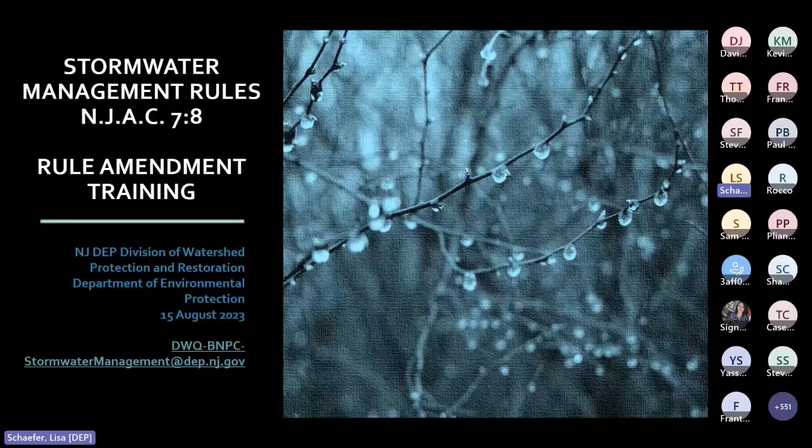Today's presentation will focus on the amendments to the stormwater management rules, as rule update presentations are now required training for those who review major development projects for a permittee under the Municipal Separate Storm Sewer or MS4 permit within 1 year of the adoption of said amendments. Okay, so today I will first provide you with a brief history leading up to the amendments and an overview of the studies that were also involved.

Executive Order 100 was signed by Governor Murphy on January 27th of the year 2020. This required that the DEP shall, within 2 years of the date of this order and consistent with applicable law, adopt Protecting Against Climate Threats or PACT regulations. Furthermore, it required that the DEP integrate climate change considerations, such as sea level rise, into its regulatory and permitting programs, including but not limited to land use permitting, water supply, stormwater and wastewater permitting and planning, air quality, and solid waste and site remediation permitting.

So subsequently, Admin Order 2020-01 was signed by then Commissioner McCabe to integrate climate change considerations and so forth into the DEP's regulatory and permitting programs. So in accordance with this executive order, the department conducted research and underwent several stakeholder meetings beginning in 2019, first as part of the PACT rules, and then again independently in October of 2022. The department released a New Jersey scientific report on climate change in 2020 and reports on rainfall studies in 2021. All of these were in preparation to address the impacts of climate change, which then led to the proposal on December 5th in the year 2022 and adoption on July 17th of this year of the Inland Flood Protection Rule.

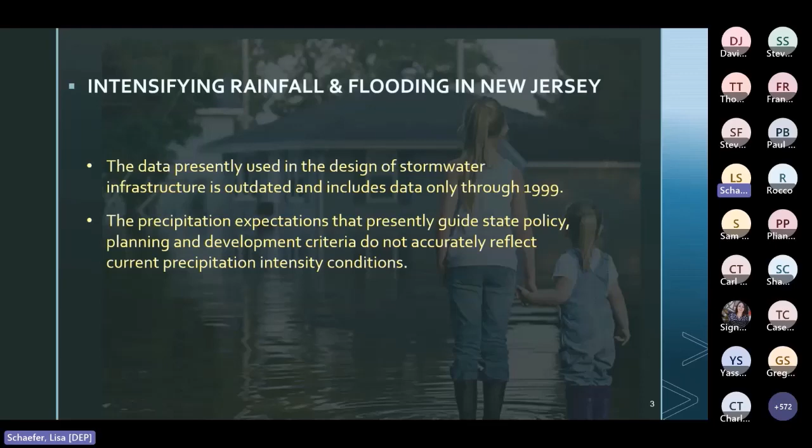So the reasoning behind the rule amendments is based on the scientific studies showing the data used for the design of stormwater infrastructure is outdated. It no longer reflects what is happening in our state. So much so that in November of 2021, the Northeast Regional Climate Center, which is a partner with the National Oceanic and Atmospheric Administration, which I will abbreviate as NOAA, and the DEP released studies showing that the 2, 10, and 100-year storms have all experienced increases in rainfall depths since 1999. Furthermore, reasonable predictions based on this information show that this will only worsen over the coming decades.

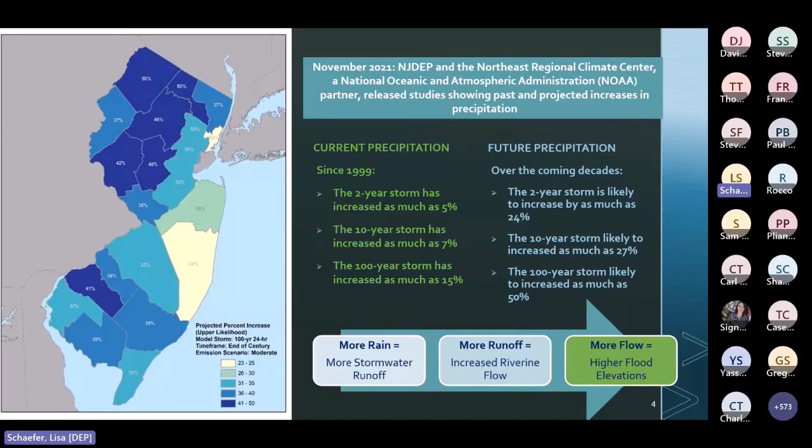So in many locations, stormwater runoff is often discharged off-site, and with the increasing intensity and rainfall depth, this will stress our infrastructure such as bridges, roadways, and stormwater management systems, and will create further problems down gradient of those discharge points. This in turn increases risks to the inhabitants and properties. Keep in mind, New Jersey is the most densely populated state, and most of the population centers are in the floodplain. So adding climate change on top of worsening flooding is just going to compound the issue and make things unsustainable.

The NOAA's rainfall precipitation and intensity data published in Atlas 14, Volume 2, or on NOAA's Precipitation Frequency Data Server have been used in stormwater management designs. However, the precipitation and intensity were based on data collected from weather stations ending in 1999, meaning the design doesn't really reflect the precipitation we are experiencing today. Add to that runoff from older sites where there was no stormwater management, and the impacts will worsen, potentially wiping out infrastructure and putting people in danger.

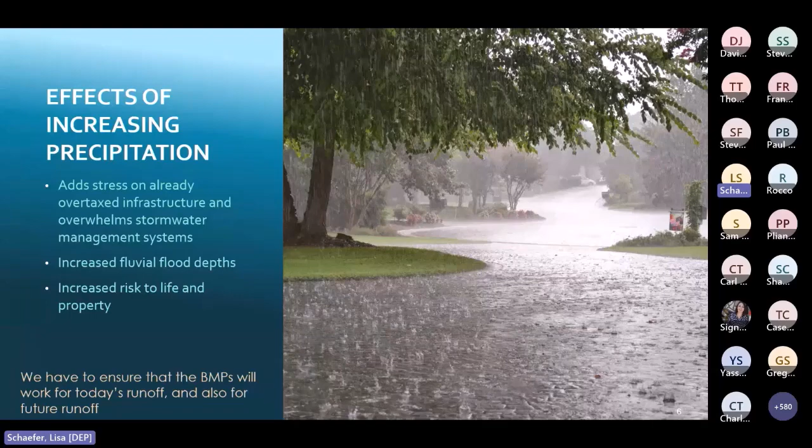And after that, there will be a bit longer discussion of the multipliers to be applied to modify the published NOAA rainfall data and how those multipliers are used in the calculations for groundwater recharge and stormwater runoff quantity control. I will also provide some examples, and I will briefly touch on the updates made to the BMP manual, the frequently asked questions, and the Municipal Stormwater Control Ordinance, which I will abbreviate as SCO when I cover the later slides. After this presentation, the team will provide answers to questions not covered in the chat, as well as to any additional questions asked as time permits.

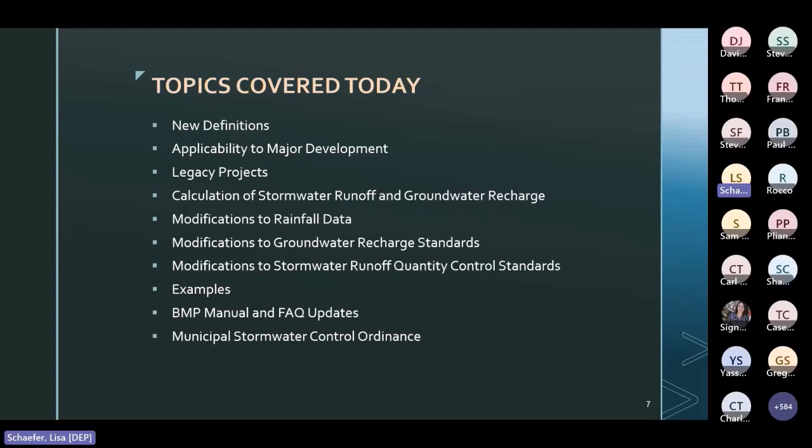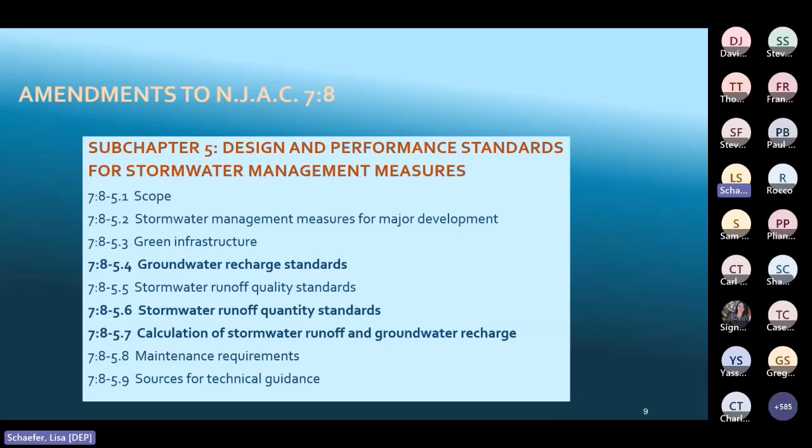So for those of you who like to keep things organized, all of the slides that follow that cover the stormwater management rules are a dark teal green and have a deep red tab on the top right. The slides for subchapter 1 will have a light green stripe on the left, and those for the calculations portion, which is subchapter 5, will have a deep red stripe.

So the amendment adds two definitions regarding public transportation projects that are subject to the rules in effect prior to this rule adoption, depending on when the public transportation projects achieve a certain status. So for public roadway or railroad, that means a pathway for use by motor vehicles or trains that is intended for public use and is constructed by or on behalf of a public transportation entity. A public roadway or railroad does not include a roadway or railroad constructed as part of a private development, regardless of whether the roadway or railroad is ultimately to be dedicated to and/or maintained by a governmental entity.

Public transportation entity means a federal, state, county, or municipal government, an independent state authority, or a statutorily authorized public-private partnership program pursuant to the public laws from 2018 at the citation noted here on the slide that performs a public roadway or railroad project that includes new construction, expansion, reconstruction, or improvement of a public roadway or railroad. Take note that a public transportation entity includes municipalities and counties that perform public roadway or railroad projects, but does not include the roadway within a private development, but dedicated to the municipalities or counties, or to be maintained by the municipalities or counties.

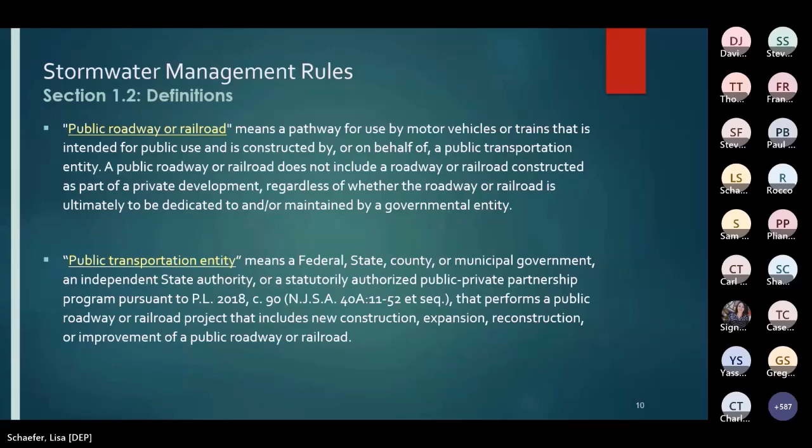A complete application means that the application submitted to the municipality has all of the required documents specified in the municipality's ordinance, and the municipality's reviewer considers the application complete for the review of the stormwater management design. Take note that the application and all accompanying documents shall include the documents for stormwater management. Right? If the application submitted to the municipality for those approvals did not include the design documents for stormwater management, the legacy provision here will not be applicable.

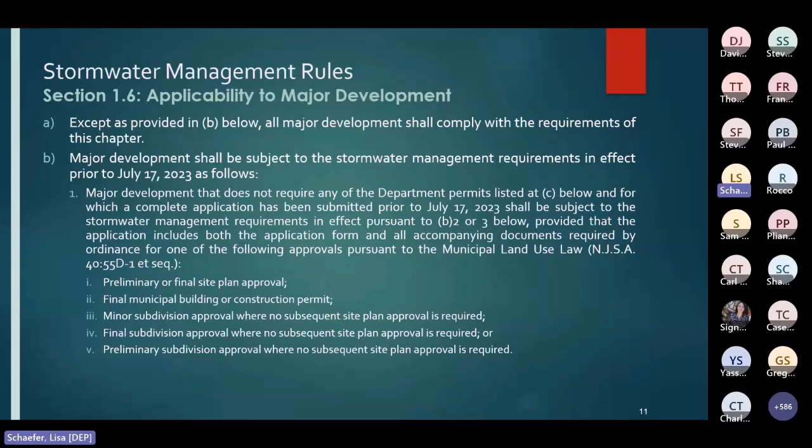Okay, now for item 4, which is the projects submitted to the department. So if a major development project needs a flood hazard area, a freshwater wetlands, a Coastal Area Facilities Review Act, a waterfront development, or a Highlands permit, and those permit approvals need a stormwater management review component, is technically complete and has been submitted prior to July 17th, it is subject to either the rules in effect on March 1st of 2021 or to the rules in effect from March 2nd of 2021 through July 16th of this year, depending on when it was submitted, and provided everything required by the department's rules for those permits, plus the application form, are submitted prior to July 17th of 2023.

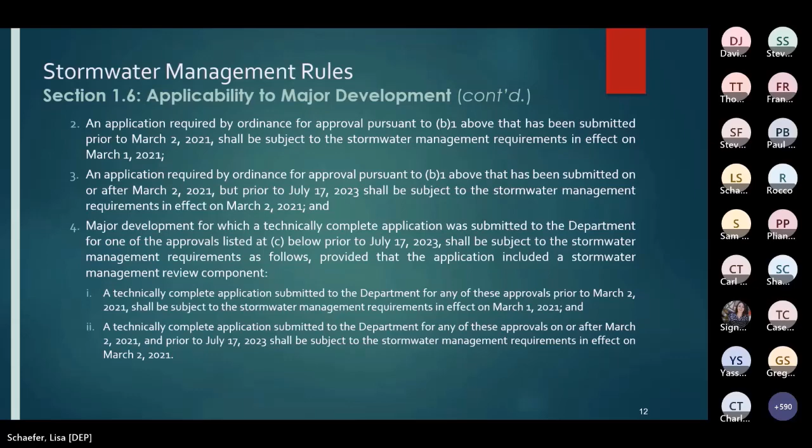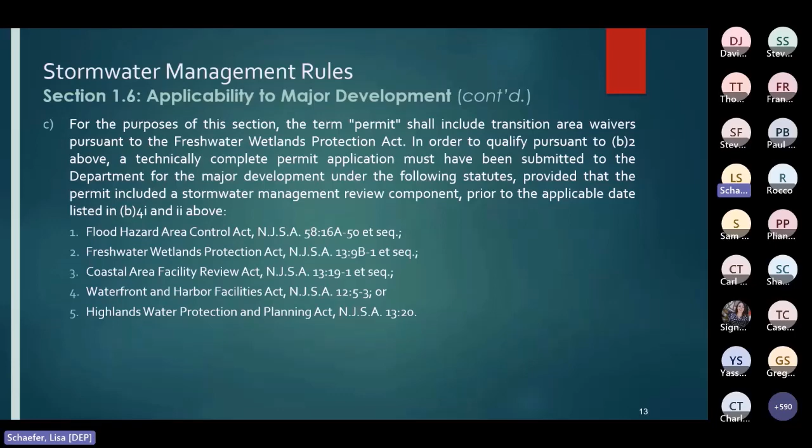One other thing is technically complete means that each item included in an application provides sufficient information for the department to declare the application complete for review, public comment, or public hearing. Okay, now I mentioned 1.6C. These are those department permits that I mentioned earlier, along with where they're found in the New Jersey statutes.

Moving on, exemptions expire with the expiration, termination, or other loss of duration or effect of either of those qualifying local approval or department permits, whichever came first. The expiration of local approvals under B1 that I covered just a few slides ago shall be governed by local ordinance. So in the event that there are multiple qualifying department permits listed in 1.6C above, the expiration date is governed by that permit which expires last, provided that the permit is still in effect. But once the exemption expires, the major development shall be subject to all requirements of the rules as amended upon reapplication for that permit and all subsequent permits or local approvals under the municipal land use law.

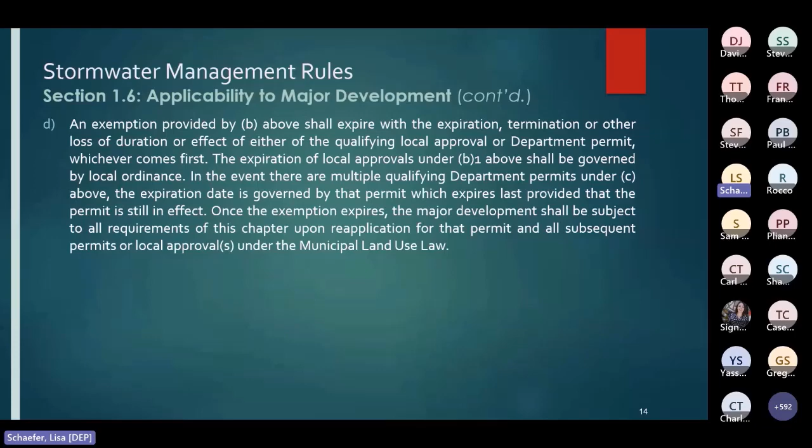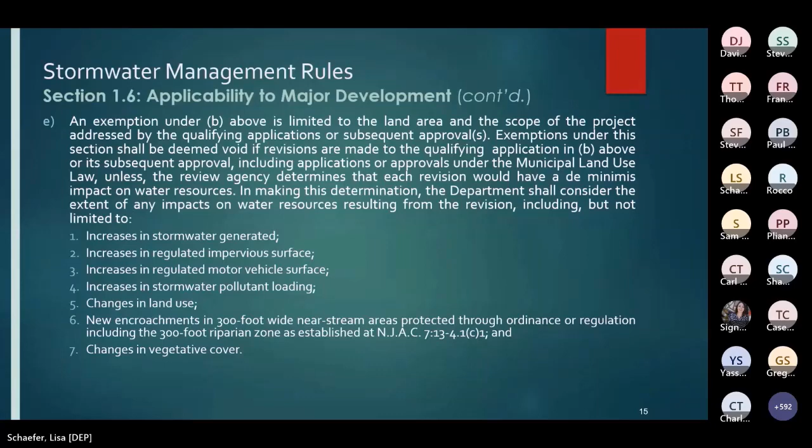An additional legacy provision exists for certain public roadway and railroad projects, and it's found under N.J.A.C. 7:8 in 1.6F. Public transportation entities must demonstrate that the project has determined a preferred alternative or has reached an equivalent milestone prior to the rule adoption. The logic is that these projects have already undergone a significant level of planning and design such that revising the project now to meet the rules would be a waste of public funds.

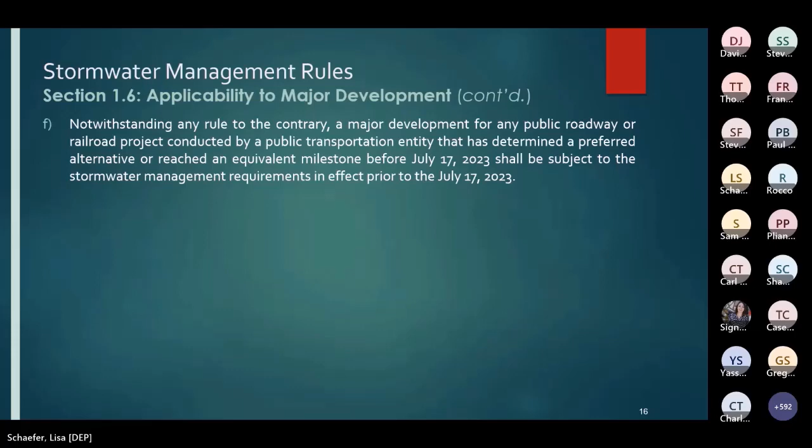Okay, so next are a couple of examples to help clarify the applicability portion of the rule adoption. So for example 1, a non-residential major development submits an application for the department's Flood Hazard Area Control Act permit with a stormwater review component on August 1st of 2023, and it's deemed technically complete. The non-residential major development also submits an application to the township for a preliminary site plan approval on August 1st of 2023, but the township stormwater control ordinance is still in alignment with the rules in effect prior to July 17th.

Okay, so what rules are applicable to this non-residential major development? The answer is that the department will review the stormwater component of the application under the stormwater management rules adopted on July 17th. Therefore, the non-residential major development shall design its stormwater management in accordance with the adopted rules. However, the township will review the stormwater management under its SCO pursuant to the prior rules. Since the design complying with the adopted rules is supposed to be more comprehensive and has higher capacity than the design under the prior rules, the design under the adopted rules should be able to pass the SCO pursuant to the prior rules.

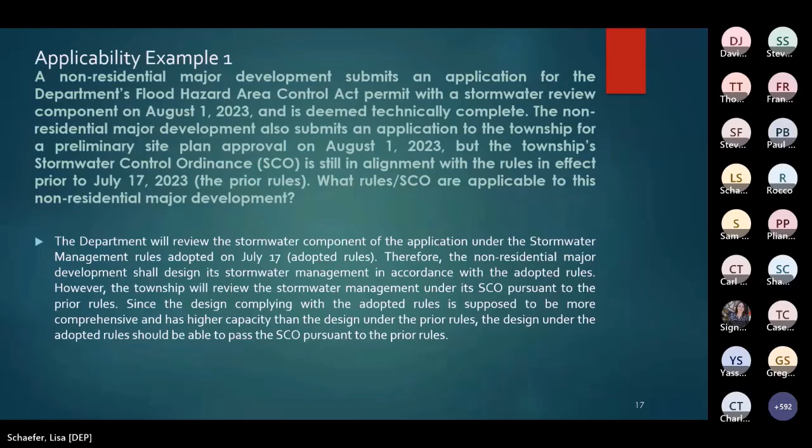Okay, example 2. A non-residential major development submitted an application for the department's Flood Hazard Area Control Act permit with a stormwater review component on June 1st of 2023, and it was deemed technically complete. The non-residential major development will also submit an application to the township for a preliminary site plan approval later on December 1st of 2023. Now, the Township Stormwater Control Ordinance has been amended to be consistent with the rules adopted on July 17th by the time that the application was submitted to the township. So in this case, we're wondering which rules and SCO are applicable to this non-residential major development.

Well, in this case, the department will review the stormwater component of the application under the stormwater management rules effective on July 16th, the prior rules. However, the non-residential major development will need to redesign its stormwater management to comply with the township's SCO, which has been modified pursuant to the adopted rules. Receipt of the department's approval on the stormwater management design does not necessarily secure the township's approval. The township's reviewer shall apply the township's SCO pursuant to the adopted rules when reviewing the stormwater management design for the non-residential major development.

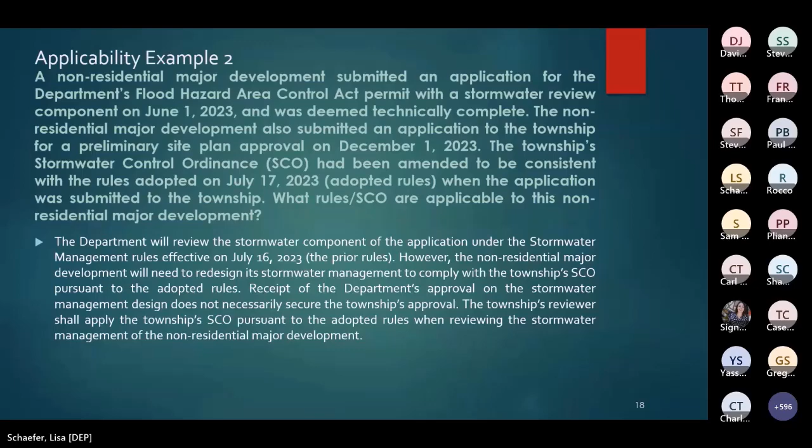Okay, so next up is the amendments to Subchapter 5, which is the design and performance standards for stormwater management, and the slides will have this red stripe on the left to indicate that they all pertain to Subchapter 5 of the rules. Now, there are no changes to Subsection 1, which is scope, 5.2, which is stormwater management measures for major development, 5.3, which is the green infrastructure standards, 5.5, which is water quality, 5.8, which is maintenance, or 5.9, technical sources, but I'm going to handle the remainder of the subchapters out of order, starting with 5.7, the computational methods, as this impacts the remaining subsections.

Now, right away, there is a change in the allowable computation methods, namely only the NRCS methodology is found in the adopted rules. So take note that the NRCS methodology must be used when calculating the water quality design storm. And throughout the remainder of this presentation, I'm going to do my best to give you page citations from the BMP manual. This particular information is included under item 13 on page 32 of chapter 5 in the BMP manual. Of course, you would refer to the National Engineering Handbook, which is available at the link provided on this slide.

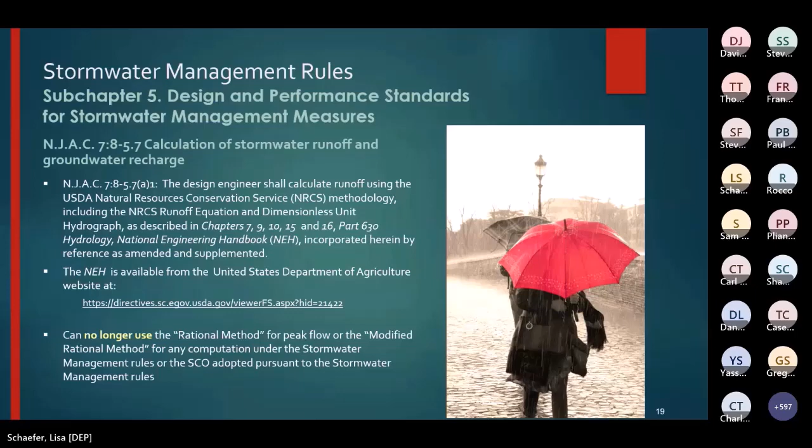Okay, the first set of precipitation depths to be used are those for the current 2, 10, and 100-year design storms. These will adjust the 1999 rainfall data to the year 2019. To the right is a reprint of Table 5-5 from the adopted rules. To denote the adjustment of rainfall data to 2019, the precipitation depth we will use for the 2-year storm for a project, say in Warren County, is 102% of the depth listed on the NOAA PDF server for the 2-year storm. For the 100-year storm in Warren County, the rainfall depth is adjusted to be 115% of the 100-year rainfall depth found on the NOAA PDF server.

The first example that will be presented later today will illustrate the calculation of the current precipitation rainfall depth for a site. And if you're not familiar with using the NOAA PDF server, start on page 12 of the revised chapter 5 in the BMP manual using the publication date, it was published in July.

Now, for a site that's in more than one county, you multiply the rainfall depth from the first area by the county's specific current precipitation adjustment factor for the design storm specified, meaning the 2, the 10, or 100 as applies, and then multiply that product by the percentage of the total site area lying in the first county.

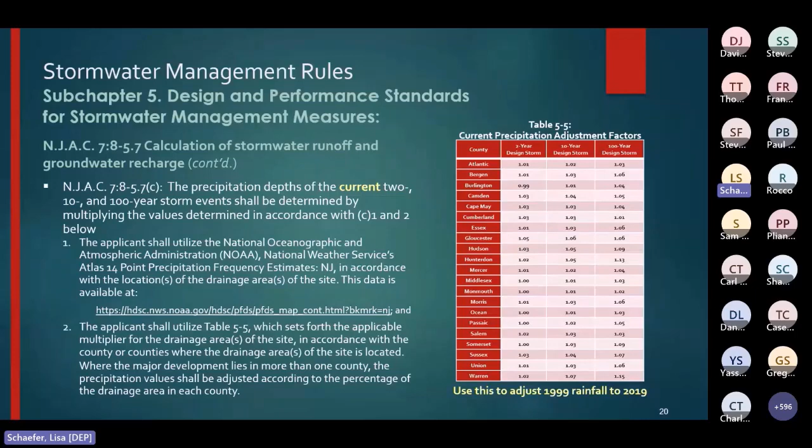Okay. There's a second multiplier required in the rule amendments. Applying the future precipitation change factors to the published NOAA rainfall data will allow us to look to the period from the year 2050 through 2099 to address the future impacts of climate change. To the right is a reprint of Table 5-6 from the rules.

And what that means is that the precipitation depth we would use for the projected 2-year storm for a project in Warren County is 120% of the depth listed on the NOAA PDF server for the 2-year storm. For the projected 100-year storm in Warren County, the rainfall depth is adjusted to 137% of the 100-year rainfall depth found on the NOAA PDF server.

So for a site in more than one county, it's the same method from the bottom of the previous slide, but of course it uses the future projected change factors. Once more, you multiply the rainfall depth from the first area by the county-specific future precipitation change factor for the design storm specified, and then multiply that product by the percentage of the total area lying in the first county.

You do this for the second area using the future precipitation change factor for the second county for the same year design storm, and sum these products to get the future projected total rainfall depth for that design storm. And of course, I will have examples in just a little bit on adjusting rainfall data using these multipliers.

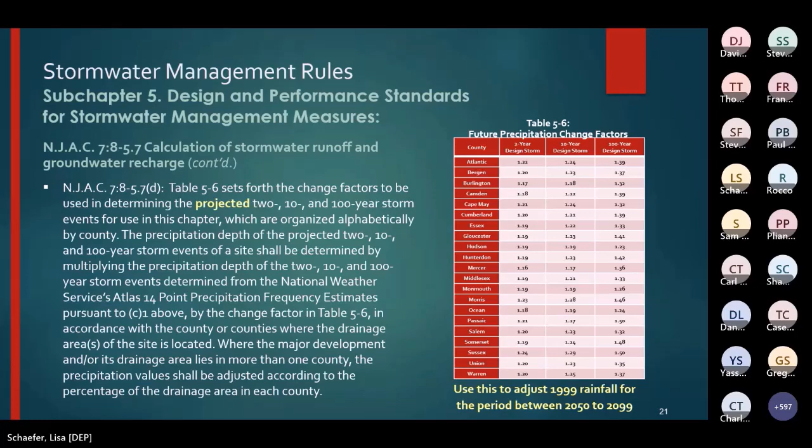Okay, now we have to also talk about time of concentration calculations, as the equation uses the rainfall depth resulting from the 2-year storm event. Now, although how to calculate the travel time of runoff in sheet flow is not explicitly stated in the rules, it's because the rules require using the current and projected 2, 10, and 100-year storm events in stormwater calculations.

The 2-year storm event used in the calculation of the travel time of sheet flow shall also use the current and projected 2-year storm events respectively. Okay, so time of concentration for the current storms will use the current rainfall data. That is, multiply the NOAA rainfall depth for the 2-year storm by the current precipitation adjustment factor.

However, for projected storms, be sure to multiply the rainfall depth for the 2-year storm by the future precipitation change factor. And if you're dealing with small areas, there really won't be much difference, but you will see this for larger drainage areas.

One other thing I must mention is that the rainfall depth of the 2-year storm, or P sub 2, that's used in the calculation of the time of concentration for the water quality design storm is based upon using the projected 2-year storm event. That's a lot to remember, and you will find all of this information on page 25 of Chapter 5 in the BMP manual.

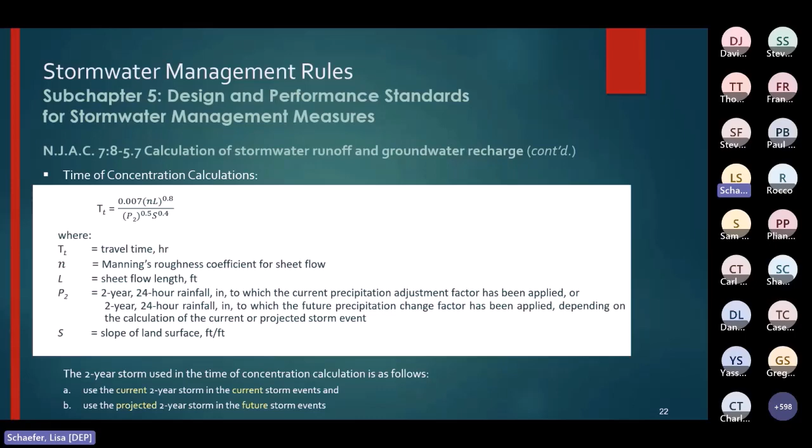Okay, so now that I've explained what the rules mean by a current or a projected design storm, let's go back to subchapter 5.4 in the rules. For groundwater recharge, the rules allow you the option pursuant to N.J.A.C. 7:8-5.4(b)1 under the first Romanette here on this slide to address the loss of recharge on an annual basis. And that's done through the use of the groundwater recharge spreadsheet. Nothing changed for this option.

However, if you're going to infiltrate the difference between the pre and post-construction runoff volumes, you must do so as required under the second option shown here, using the projected 2-year design storm. And remember, the projected 2-year storm uses the future precipitation change factors found in Table 5-6 and the column for the 2-year storm. And of course, Chapter 6 of the BMP manual has been updated to match the rule adoption.

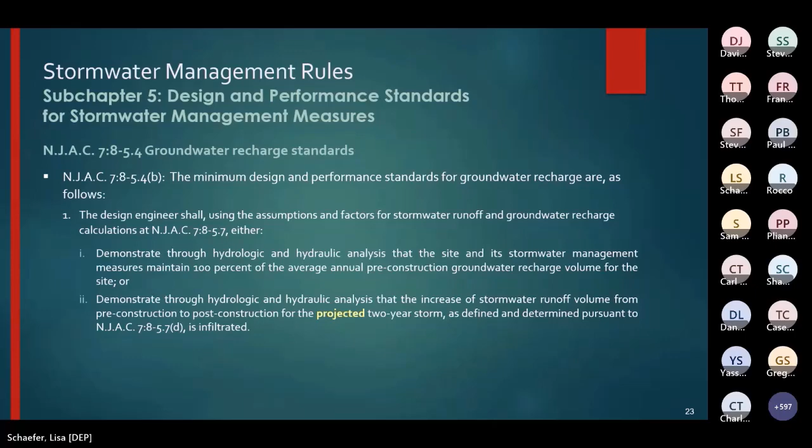And if you recall, 5.7C is covered on slide 20 in this presentation, and 5.7D is on slide 21. The bolded text will be discussed after we look at the other options for demonstrating stormwater runoff quantity control compliance.

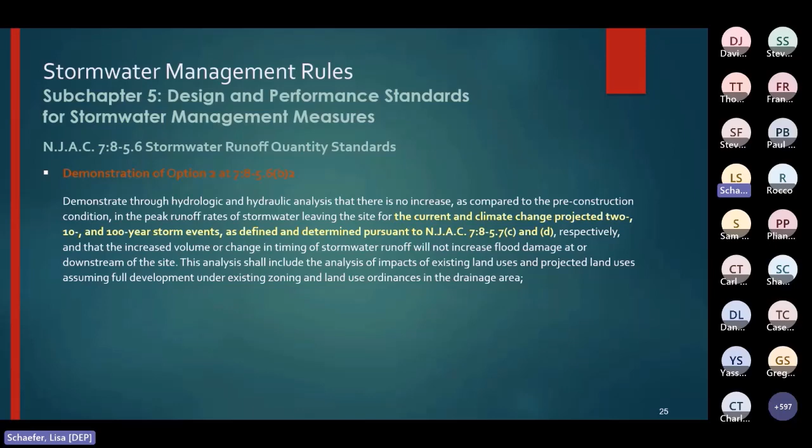Okay, so here's the rule text for the second option to demonstrate compliance with the runoff quantity standards. And again, as on the previous slide, the bold or yellow text is what is changed in the rule adoption. And lastly, this is the rule text for the third option to demonstrate compliance with the runoff quantity standards. And once more, what's bold and yellow is the portion of the rule that's been amended in the rule adoption.

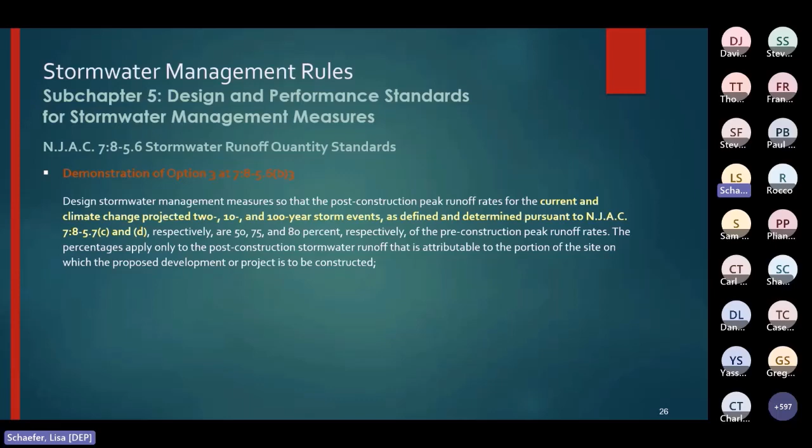Okay. Well, regardless of which option is selected, the quantity control calculations required will have to include an analysis of the runoff volumes produced for both the current and the projected design storms. Okay, so that's 6 different sets of precipitation calculations.

All right, now, if you recall, I covered time of concentration calculations back on slide 22, and that also comes into play here. So if you are using modeling software to design or review the accuracy of designs, you may want to create a model for the projected storms that is separate from those for the current storms because of the different rainfall depths used in your time of concentration calculations. And you may also find that page 84 of chapter 5 in the BMP manual, which is the updated summary of modeling guidance, will be helpful.

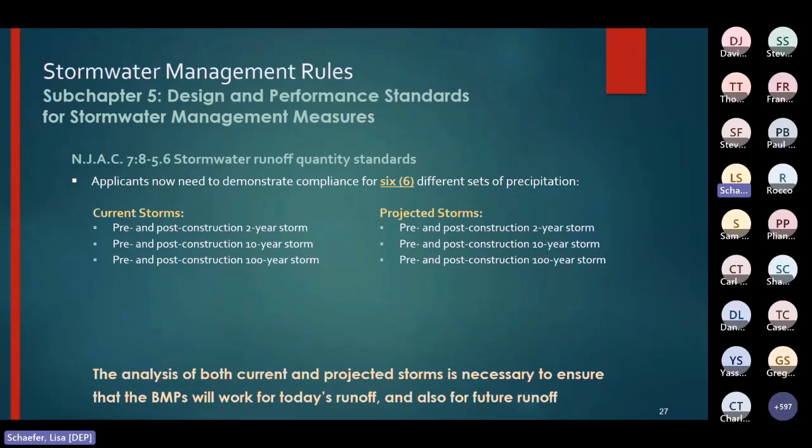All right, so I have 5 examples for you today. The first is applying the current precipitation adjustment factors to a site located in just one county. The second is for a site that's partly in one county and partly in another. The third is the comparison of the hydrographs from the pre and post-development conditions for the projected and current storms when impervious cover is reduced in the proposed design. The fourth shows how a design using a small-scale BMP will meet the groundwater recharge requirements. The fifth example is sizing an MTD using the NRCS methodology.

So for the first example, we're going to apply the current precipitation adjustment factors to the rainfall data for a site that's located at Trenton Station 2 on the NOAA National Weather Service PFDS website. All right, so we go to the website found at the URL shown on the slide, and in the data description section from the data type drop-down menu, make sure that precipitation depth rather than precipitation intensity is selected as shown on the left here. Similarly, for the time series type, ensure partial duration has been selected from that drop-down menu.

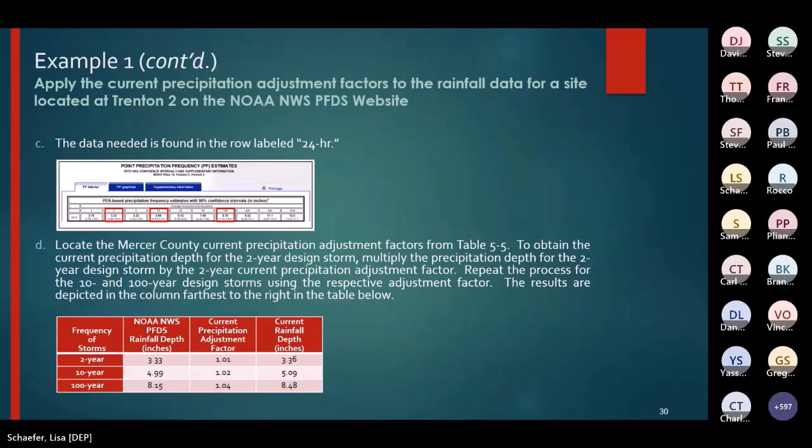For the next example, when a site is situated in 2 counties, the method is to obtain the current adjusted rainfall depths for each of the 2 counties and then weight average them based on the area of the site in its respective county. So here the site is located on the county line shared by Middlesex and Mercer counties. 1/3 of the site is in Middlesex and the remaining 2/3 is in Mercer County.

In step A, we obtain the NOAA data and the current precipitation adjustment factors and calculate the rainfall depths for each of the design storms for each of the counties. Next, as shown in the second table, we multiply the percentage of the project area within each county with the current precipitation for the respective county from step A, and then we're going to just sum the results for each of the design storms, and the final current precipitation depths are in the bottom row of the lower table.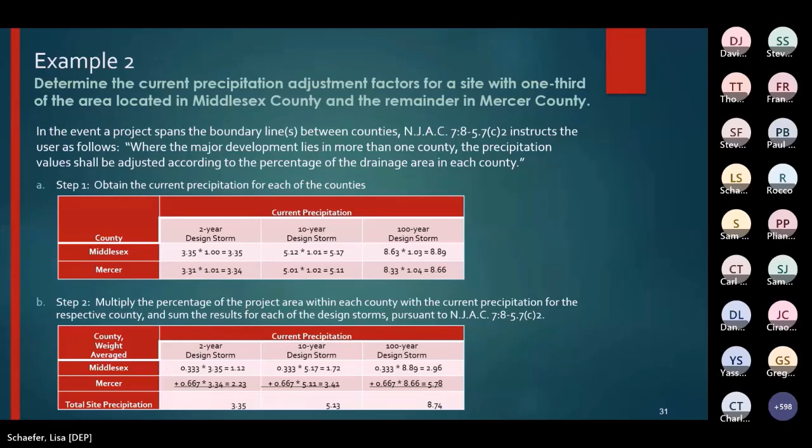This example provides a scenario showing non-compliance with the requirements when the proposed development reduces the regulated motor vehicle impervious surface and increases the slope of this surface.

So often for redevelopment projects, a designer may choose the first option at N.J.A.C. 7:8-5.6(b) to demonstrate compliance for quantity control: that for stormwater leaving the site, the post-construction runoff hydrographs for the current and projected 2, 10, and 100-year storm events as defined and determined pursuant to 5.7(c) and (d) respectively do not exceed at any point in time the pre-construction runoff hydrographs for the same storm events.

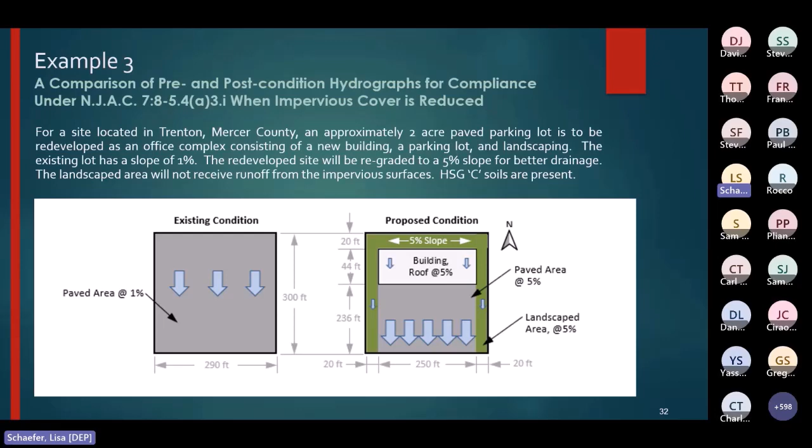Even a reduction in impervious cover should be reviewed to check the adjustment or change factors have been correctly applied to the appropriate storm calculations, and then the data examined instead of just the hydrographs to confirm that there are no exceedances. Now, you would similarly inspect the data for the other projected and all of the other current design storms to look for other instances where the post-development hydrograph exceeds the pre-development hydrograph.

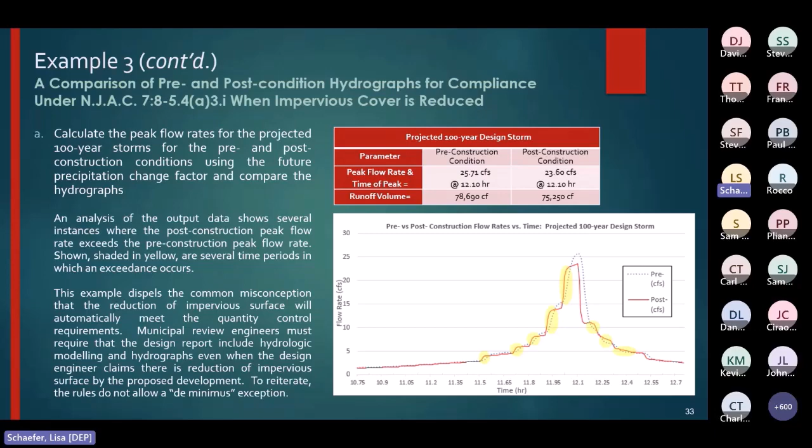Example 4, we're going to look at a scenario showing the groundwater recharge calculations. Okay, so we have a 2.5 acre wooded lot located in Somerset County, and we have the latitude and longitude of the site as well. The proposed development consists of a 1 acre office building, a ½ acre parking lot, and a ½ acre lawn area, plus 0.5 acres of existing woods to remain undisturbed.

And we're going to design a stormwater management system to meet the stormwater management rules. And in this case, the soil present on site is HSG B. So we're going to assume that a small-scale infiltration basin is to be designed to meet the design and performance standards for the demonstration of the groundwater recharge requirement by infiltrating the increase in stormwater runoff from pre-construction to post-construction for the projected 2-year storm. And we are going to calculate the volume of runoff to be recharged.

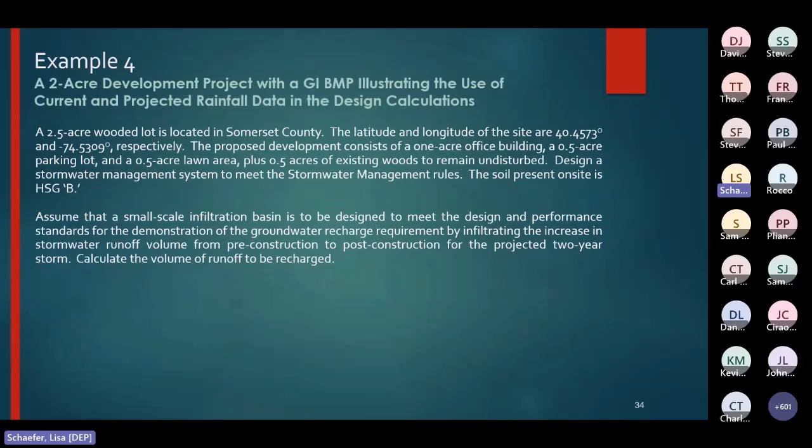Okay, now, in Chapter 5 of the revised BMP manual, a design example uses these same site conditions shown here, but that design is laid out to manage stormwater close to the source of runoff, and the example includes in detail all the calculations. So if you want to see that detailed design, that's example 5-8, and it begins on page 71. But for this simple one, I'm going to skip the parts of the design calculation just to get ahead to groundwater recharge.

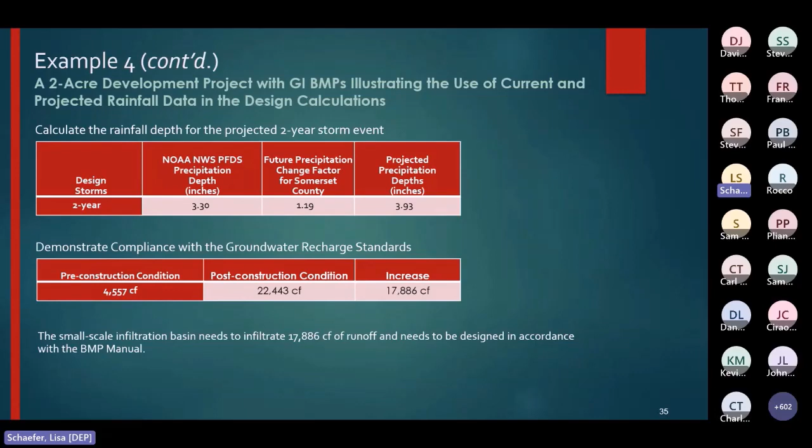Okay, the fifth example is sizing an MTD using the NRCS methodology. And if you recall, the rule amendments discontinued the use of the rational method and modified rational method for stormwater calculations. This example will walk you through what is now required. Okay, so we're going to calculate the peak flow rate for sizing an MTD, treating the water quality design storm from a 1/4 acre impervious motor vehicle surface. And the following parameters apply.

So of course, the area is a 1/4 acre. We'll use a 5% slope. The CN value that we will use in our calculations is 98, as it is 100% impervious. Okay, our projected 2-year storm rainfall depth is 3.84 inches, and the hydraulically most distant point to the inlet of the MTD is 110 feet.

So when using the NRCS methodology, you need to calculate the time of concentration. And for that, we follow the method that's covered in example 5-1 of chapter 5 in the BMP manual. And the example that is also covered here, you'll find on page 33 in the BMP manual. All right, it also uses the formula that was on slide 22. So as I stated earlier, we use P2 for the projected 2-year storm in the T sub C calculation for the water quality design storm.

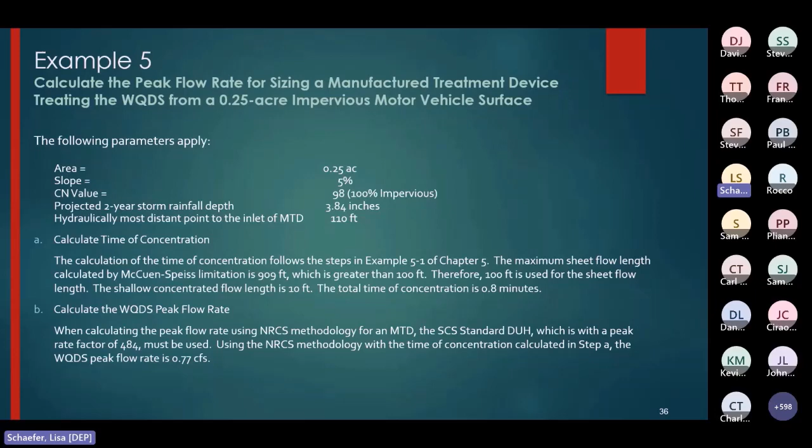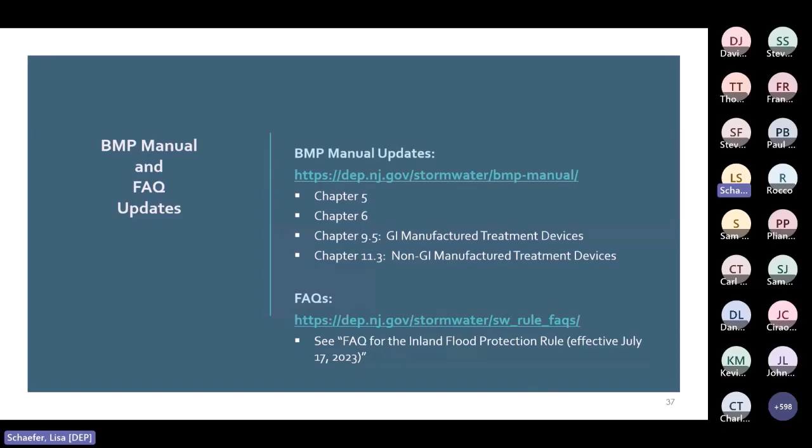Okay, so the BMP manual chapters have been updated to align with the rule adoption and are listed here. Additionally, the frequently asked questions have been overhauled to address various issues. Okay, so this, just one moment. For those of you who like screenshots, this is from the updated BMP manual webpage. Everything that has been updated to this rule adoption has been marked as updated in the manner that you see shown here.

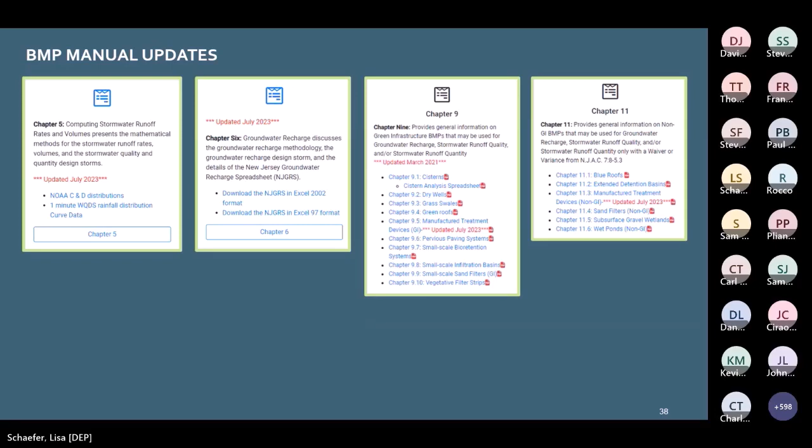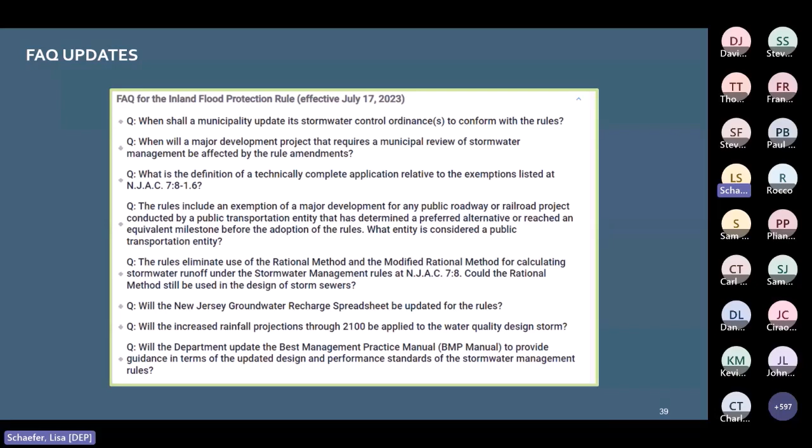And the FAQs have been expanded to address various issues, some of which I might have covered on earlier slides. The newest FAQs are at the bottom of the webpage, just above the blue footer. Look for the rule adoption date. Okay, and click on a question and it will expand to show the answer.

Now, the updates to the stormwater control ordinance align with the rule adoption, and they can be downloaded in Word or PDF formats. On the left is a screenshot taken from the updated webpage of the items available to download. There's a clean copy, plus there's a strike-through version to illustrate where text has been removed. And with this, the new text also appears in red. Lastly, there's a simplified version.

And this simplified version cites subchapter and section numbers from the stormwater management rules instead of the full text to reduce or eliminate the need for municipalities to revise their ordinance when the stormwater management rules are amended. A municipality has to comply with the applicable laws and procedures for the passage and adoption of ordinances pursuant to this simplified version.

Municipalities must amend their municipal stormwater ordinance within 12 months of written notification by the department of the need for modification and update. That notification was sent on July 17th, 2023. Also, on the lower part of this slide is just a summary of the updates that were made to the SCO to match the rule adoption. We also updated any hyperlinks in the document and cleaned up the appearance. Okay.

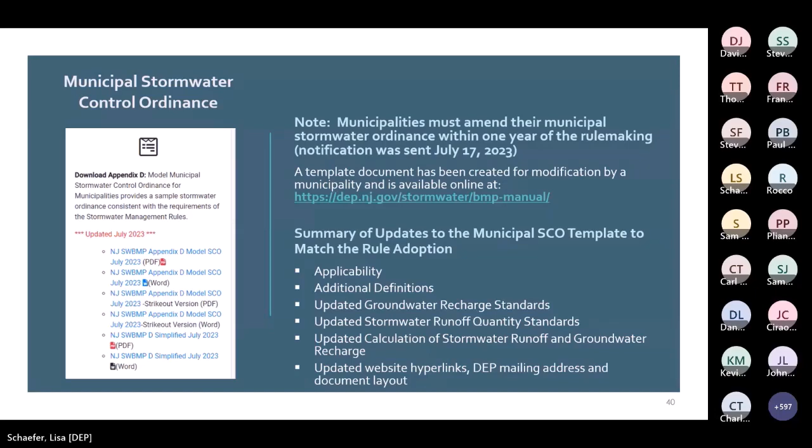All right, so we're nearing the end of my part. All right, but we're not done, so do not leave.

To summarize, the topics shown on the slide are the things that I've covered. We've had 2 definitions that were added to the rules, and after that, I covered the applicability to major development and discussed legacy provisions, which are those projects subject to the prior rules under certain conditions. There's also a change to the allowable calculation methods. After that, there was a bit longer discussion of the multipliers to be applied to modify the NOAA's published rainfall data and how those multipliers are used in the calculations for groundwater recharge and stormwater runoff quantity control.

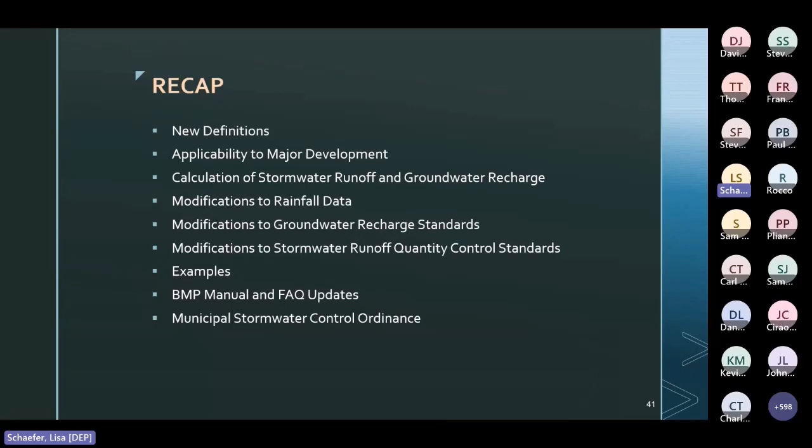And I hope you found these brief examples to be helpful. Of course, there are more and detailed examples in Chapter 5 of the BMP manual. And in fact, if you go to page 33 in Chapter 5 of the manual, you'll find a table listing the various examples to help you find your place. I've also briefly touched on the other updates that we made to the BMP manual, the FAQs, and the Municipal Stormwater Control Ordinance.